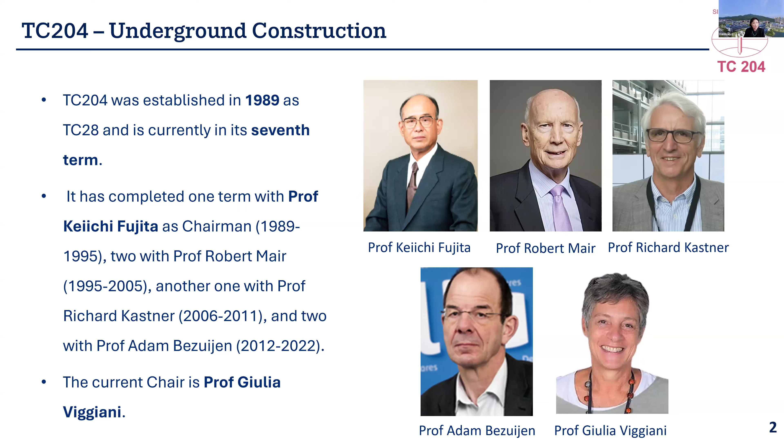So our TC is underground construction in soft soil. We mainly focus on the geotechnical aspects of underground construction, especially deep excavations, tunnelling, and major underground structures. Particularly, we are focusing on the analysis, modeling, and monitoring of ground movements and the interaction with existing structures, and the mitigation measures and risk management aspects.

Our terms of reference are being updated on the website. You may look into more details. It includes dissemination, guidelines, recommendations, conference assistance, and industrial links. I would say we are very active as a TC. Currently, the executive group includes Giulia, me and Andrea Franza, and we have a weekly regular meeting to discuss the issues in our TC and activities.

So we have 69 members over 29 countries. And we are also trying to encourage more participants, involvement of young researchers and practitioners, as well as representatives from South Africa and even South America. So one of the important activities in our TC is the International Symposium on Underground Construction in Soft Ground.

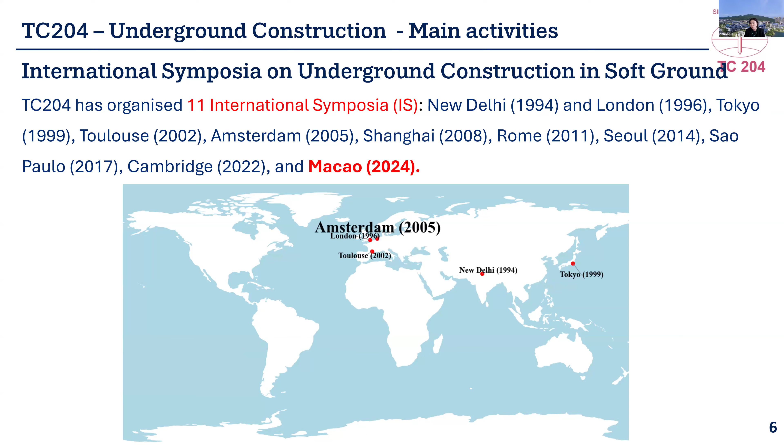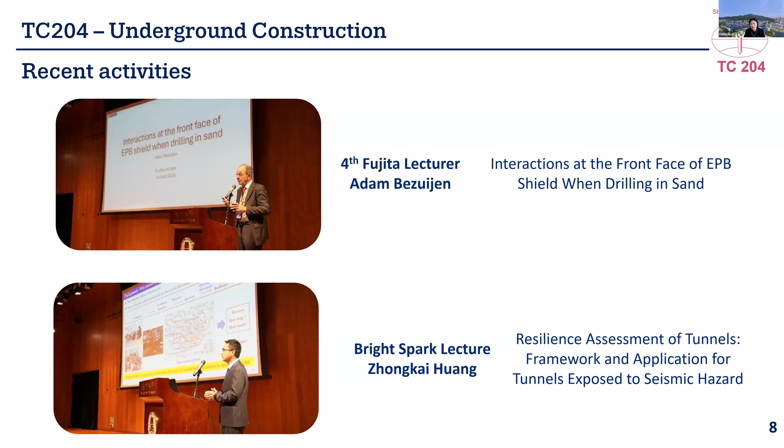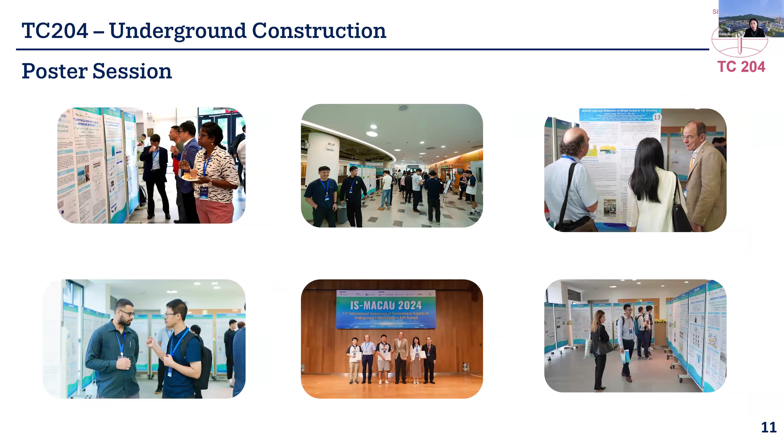During that conference, Adam presented the fourth Fujita lecture, and we had other keynote speakers. The conference also had a poster session, which attracted a lot of interaction during the 2 days. Although we had a very tight schedule, people were always walking around during the coffee breaks and sessions. The roundtable session is also very special. We invited all the keynotes and local industry people on the stage, and had a discussion of about 40 minutes on underground construction in historical areas and tunnelling across sea and coastal zones.

And our TC also supports international conference related events, like the coming Vienna conference. We have a session; especially, our TC has led a joint workshop with TC204, TC222, TC309. And that workshop will include representative contributions from each TC and also a roundtable discussion and also one keynote.

And then the next host of the IS conference is a little bit, again, complicated because of the Middle East situation. The decision from 2 years ago has to be cancelled. So Doha was actually originally designated, but now we consider it not possible to continue. And in March, we just called for candidates. And luckily, within a very short period, we received 2 candidates coming forward. And then with their passion and the local support, they presented in our plenary meeting last Friday. And then our TC members will vote.

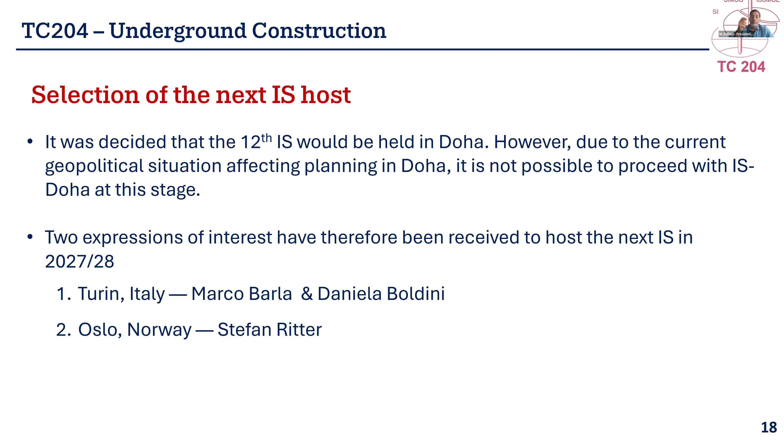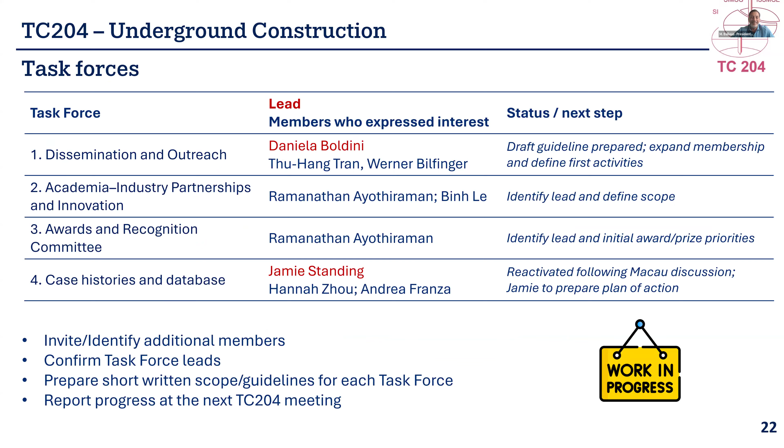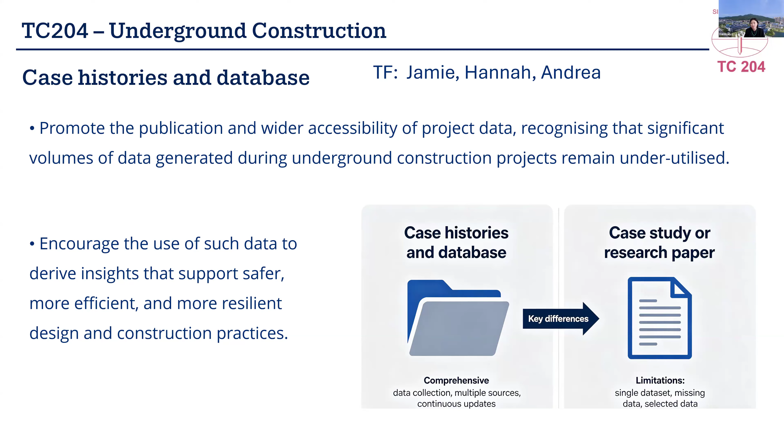And then more important, also related to the topic I'm going to share, is that we are having a task force, including me, Jamie, Andrea, focusing on the case history and the database, because we consider this an important aspect in all project construction and management. It's different from the case research paper, because there are some data not really recorded in published papers that could be very useful in future research. So we consider this should be recognized and well documented.

And my topic today will be, sorry? I'd like to tell you and the audience that we're just now launching a new journal for ISSMGE for research. So we have a journal for case studies, and we now have a new journal for research. Both aspects, like you were showing, I hope everybody will be excited to publish with our journal, the international journal. Yes, that's right. We just nominated our member to the journal's editorial board. Yes, go ahead. Thank you.

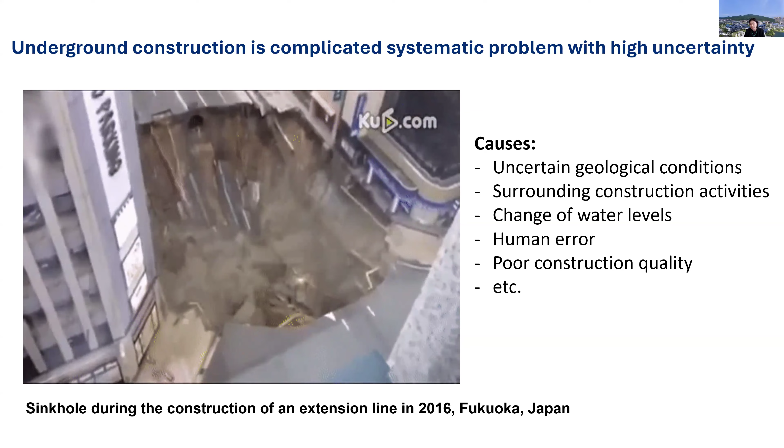Yeah, the topic today focuses on settlement prediction for shield tunneling, but actually I will just introduce some of the previous and ongoing work related to tunneling settlement. One idea I would like to highlight is that underground construction is a complicated and systematic problem with high uncertainty. The uncertainty comes from uncertain geological conditions, which everyone acknowledges, but still we are having problems even in recent years. And of course, other activities and data are not really well recorded, and then human error, etc.

So the topic today will involve three projects. One is the metro extension line in Hangzhou, and the other two are large diameter shield tunnels. The Hangzhou project is regarded as a twin tunnel case, a very interesting twin tunnel case. So this is a project of twin tunnels. The first line on this side, and the second line on that side. The first line went ahead, and the second line followed. It's very long, more than 1,000 meters.

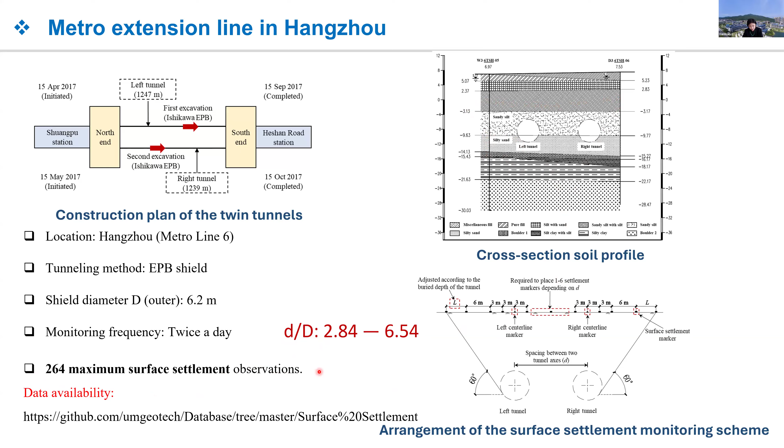So along the construction, they have well documented the settlement distribution of the tunnel. So we try to analyze it, and the spacing of the twin tunnel is changing along this line. So we could observe the twin tunnel caused the surface settlement pattern changing with different d over D. Small d is the spacing, big D is the tunnel diameter. And this is with 264 maximum surface settlement observations. So just jump to the results.

You can see the figure on the left is the smallest d/D ratio, 2.84, so the spacing is a little bit more than 2 times the diameter, which is 6 point something for the tunnel. The blue line is the transverse surface settlement profile when the first tunnel excavation is passing. The red line is the additional settlement caused by the second tunnel excavation. So the first plus the second additional is the black line, showing a W shape. This one is well recorded, and it is changing with different d/D ratios.

And we actually can see when the D over 4 times, over 4, then this pattern dismisses. All right. So the first tunnel has this very symmetric distribution. The second also symmetric distribution. So this actually is well documented, and then we have observed this pattern.

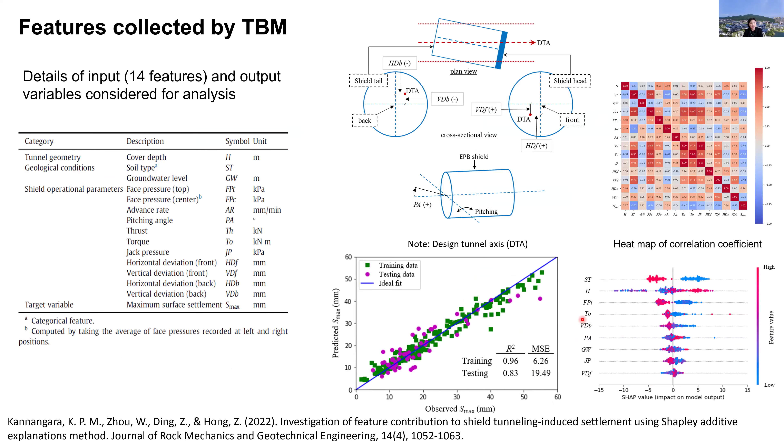And then analyzed the pattern. And in addition, because during the construction, we also have a lot of geological conditions. For example, the soil type may change, the soil overburden height changes, cover depth changing, water level not changing too much. And we also have a lot of shield operational parameters, so we analyze this using other machine methods to make data feature selection and even prediction.

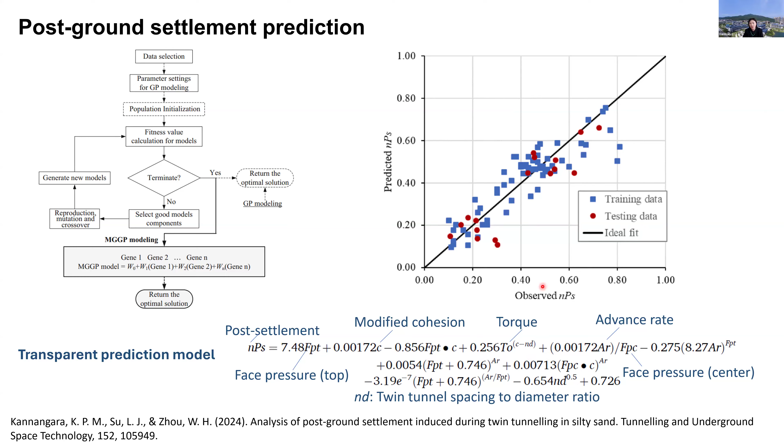I would like to go to details. I think the data is the most important part. With well-documented data and labeled data, our new techniques can do a lot more. And then another about large diameter shield tunneling. One completed work is about the Green Hart tunnel in the Netherlands. It's regarded as the biggest one in 2004, with a diameter of 14.87.

And then this tunnel is going through sandy soil, with, I can see the little person at the bottom. Little person? Oh, 14.9, yes. Yeah, right, because it's really big. Yes, with the peat and clay overlying.

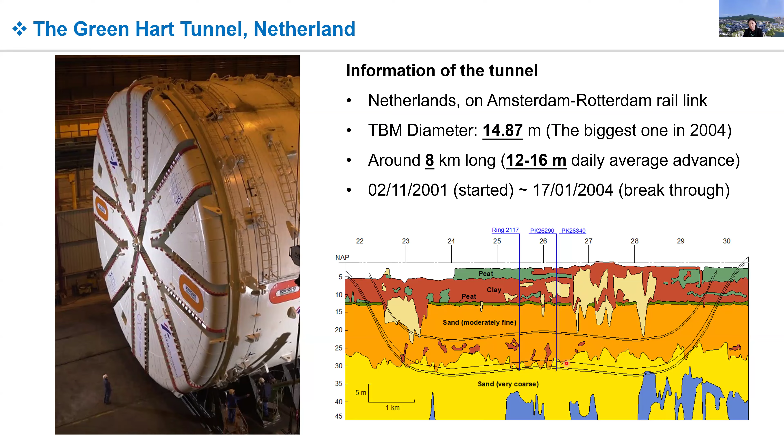So there is a concern about the excess water pressure during the tunneling. And in that case, it's a very rare case that the contractor installed a number of pore pressure transducers around the tunnel, even at places very near and far away, and grout pressure transducers, slurry pressure transducers. Then there have been 1,600 time steps of recording.

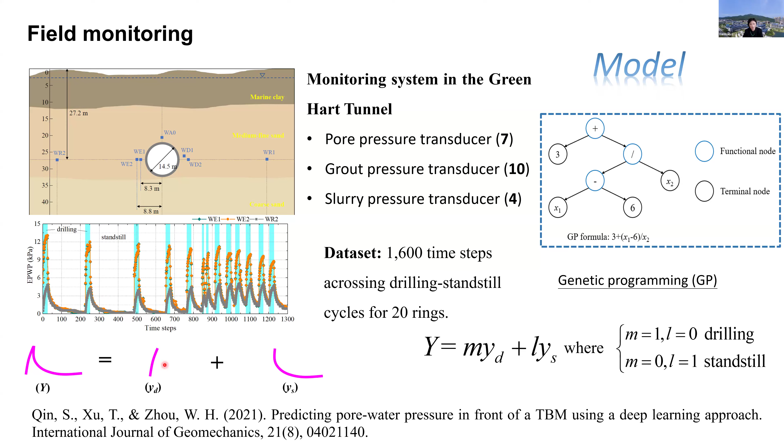On the left, you can see the water pressure is increasing and dropping during the drilling and standstill procedure. So we made this analysis, just using the genetic programming method that can simulate this pressure distribution. But this is purely a data-driven approach. Because of the data, we could do this easily, and then we can plot this spatial temporal excess water pressure distribution as the tunnel is progressing.

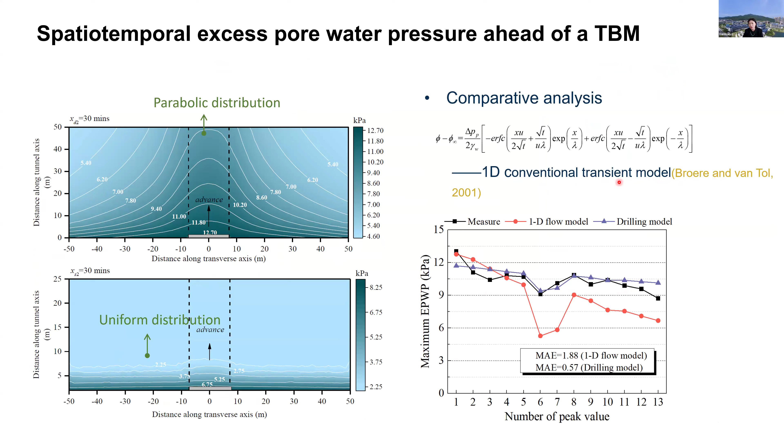So of course, because it uses all the data, it performs much better than the one-dimensional conventional transient model, which can only utilize limited data. So that is another topic.

The last case I would like to present is the ongoing project in Macau. This will be the largest, and it's still ongoing, slurry pressure shield tunneling. It is underground and crossing the sea from the E zone to A zone. Both are artificial islands, so it makes a connection between the two islands. And one thing I would like to emphasize about the case is

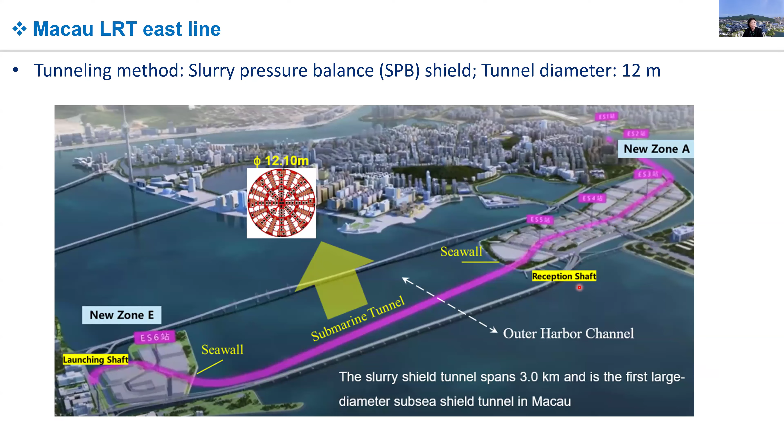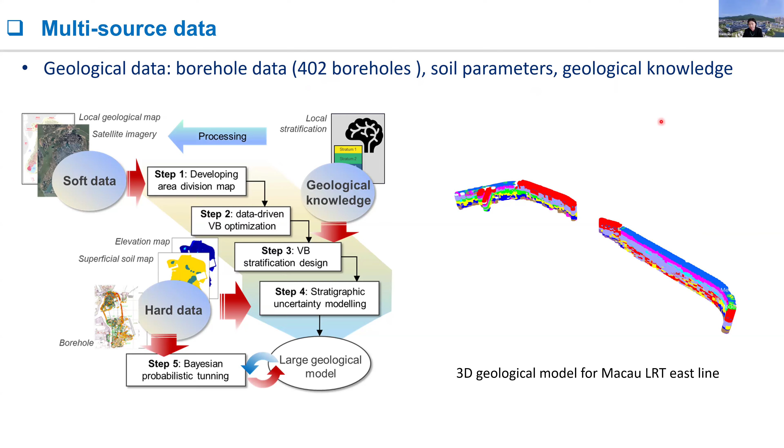it's multi-source data. The multi-source data include geological data, around 25-meter interval boreholes, 402 boreholes, and of course additional soil parameters and geological knowledge done before and after the drilling. And then we have the TBM. Now the machine is very advanced, so a lot of operational data can be transferred in real time. Thrust, torque, advance rate, grouting pressure, those are automatic.

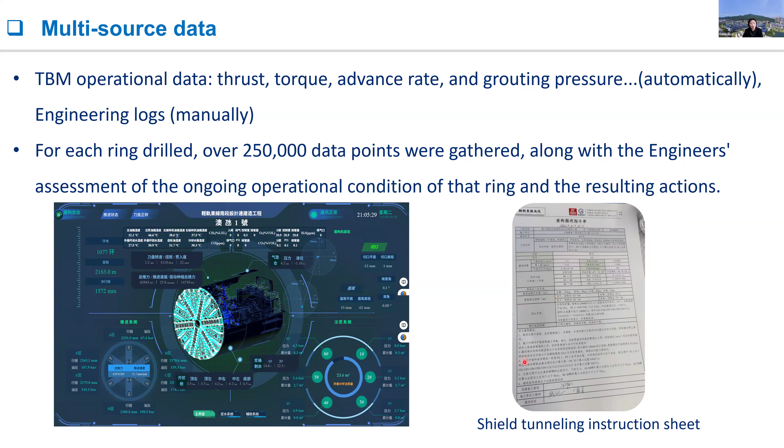But there are also very important engineering logs. For each ring drilled, there will be 250,000 data points, along with the engineer's assessment of the ongoing operational condition of that ring and the resulting action. So these logs we are also trying to collect, and how they change the pressure in the front and the grouting pressure, and sometimes they even change grouting materials to control the post-settlement.

In addition, because we have a collaboration with the construction company, before the tunnel goes into the sea, there's a sea wall. We are very concerned, because of the limited distance, about the deformation caused by the large diameter tunneling. So we have additionally installed in-depth settlement, water pressure, and lateral and vertical deformation monitoring at different distances. So these are very comprehensive monitoring results.

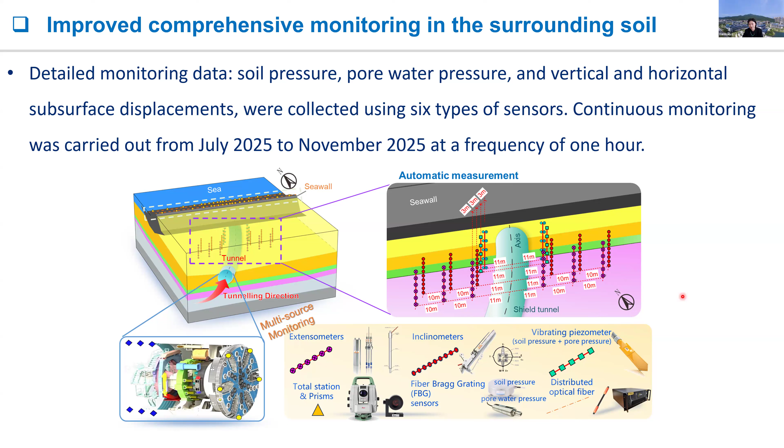And of course this tunnel went through very well, but I think this recorded data will be very valuable for future research, because this tunnel is not perpendicular into the sea crossing the sea wall. It has an angle. So with this small radius and also a large descending gradient, it's about 0.5%.

And then because of this small radius, the tunnel is always turning. So the pressure on left and right is always a little bit different, and our soil response on the two sides is also different. And in addition, with the data, we are doing ongoing analysis about controlling tunnel settlement and uplifting by the property and pressure volume of the grouting materials.

And then we are evaluating and predicting the sandstone condition using the data monitored by the accelerometers installed in the chamber. Yeah, because of the time limit, and also this work is ongoing, I hope that I have another chance to present our results on other occasions. Okay, that is all.

And my final conclusion is that underground construction is a complicated and systematic problem with high uncertainty. Field monitoring is very important, and multi-source data is valuable and underutilized, because most of the current studies focus on the data of one project. If we can utilize more data from multiple projects, that will give us much more insight. And then there's a problem of mismatching of different projects. And machine learning is very powerful in prediction, given sufficient and standardized data, labels, and knowledge.

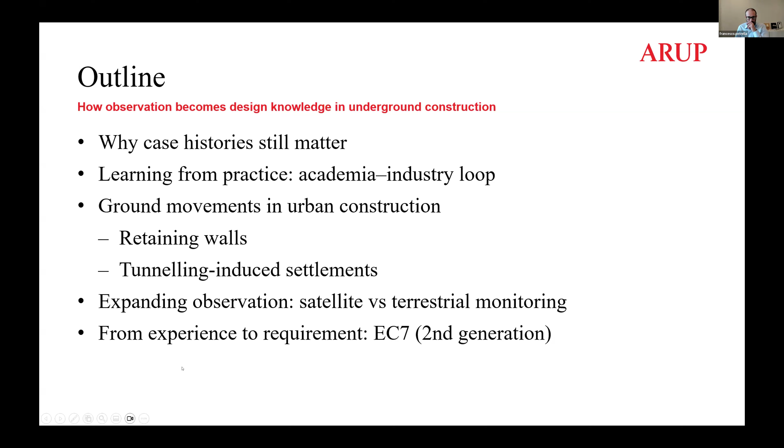So I would start from a quote which is almost 50 years old now: the benefits that derive from well-documented case histories are undeniable. That was Burland who said that. And the reason is simple. As Hannah was saying, there's variability in the ground. The ground is variable, is uncertain, is only partially known. Every design therefore relies on models, and all models are a simplification of reality.

And then on top of that, many of the effects we need to worry about are induced during construction. So effectively, reliability cannot just come from calculations. It has to also come from observation, measurements, and learning from past projects. That's why case histories are still important. And really, case histories are how our discipline actually builds new knowledge.

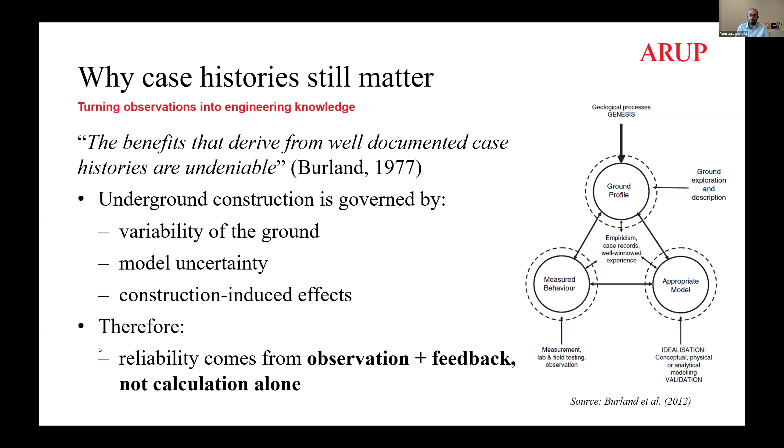So, going from projects to knowledge, I want to take one example, which I consider a living laboratory: the Copenhagen Metro. There have been very many metro lines, and I use this to make a few points. There have been more than 10 years of collaboration between the metro company, two Danish universities, and other universities, also in Italy now contributing, as well as the company I work for, Arup, and others.

So it's really to follow that continuous loop, or you could say virtuous circle, of monitoring, analysis, publishing the work, and then going to an improved design. And this takes years. We started many years ago with master theses, asking some enthusiastic students to start back-analyzing the behavior of many of the stations built in the city, and the many kilometers of tunnels. Then it became PhDs, with lots of technical papers, at the beginning conference papers and now also journal papers. So as a result, there's already a significantly improved understanding of ground movements in Copenhagen.

So this is the first of 3 case histories. I'll be brief. I'll stay within the 15 minutes. The first one is about parameter correlation, and it's just a snip of one of the stations that has been built, and it's a deep excavation in this case, right?

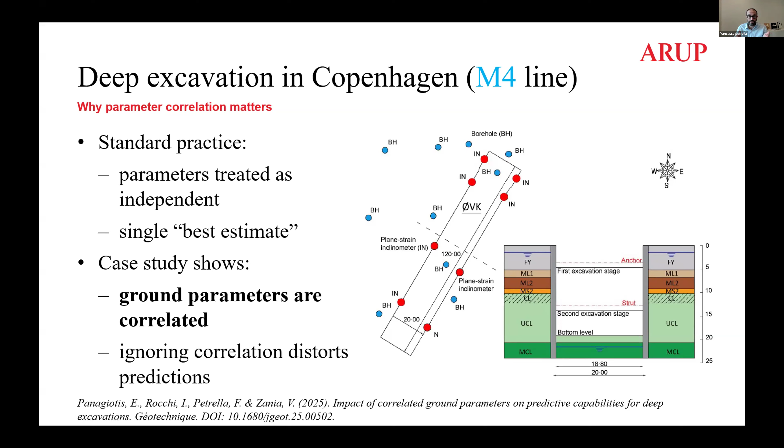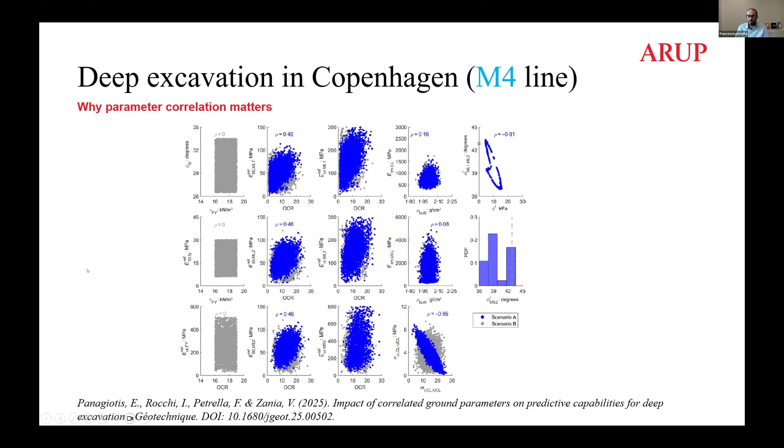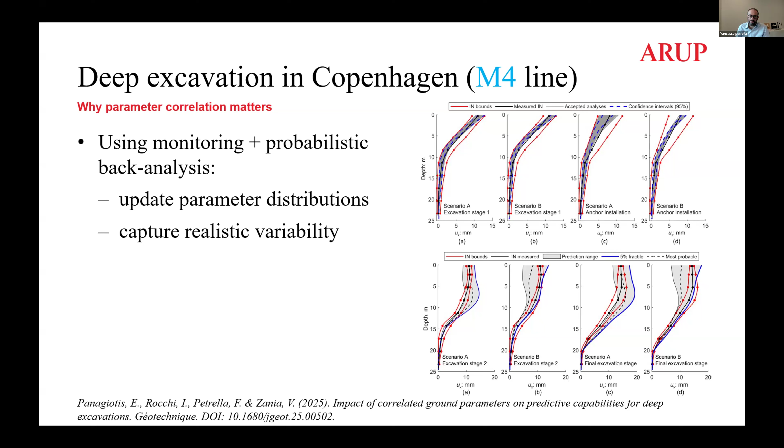If we go on with the excavation, the x-axis changes a bit. Here too, scenario B for the intermediate excavation stage 2 and the final excavation stage gives a superior back analysis. So the outcome is that, first of all, there's better prediction, but also importantly, we can obtain a faster and more stable back analysis, almost by one order of magnitude, because it took us 8 times fewer analyses when we worked with correlated data sets.

Francesco, yeah. Can you zoom on the graphs? Just explain the snake. What is the gray zone? Zoom on the 4 graphs. I'll try. Because I can't see. Is that better? Yes. Scenario A, B. That's zoomed in.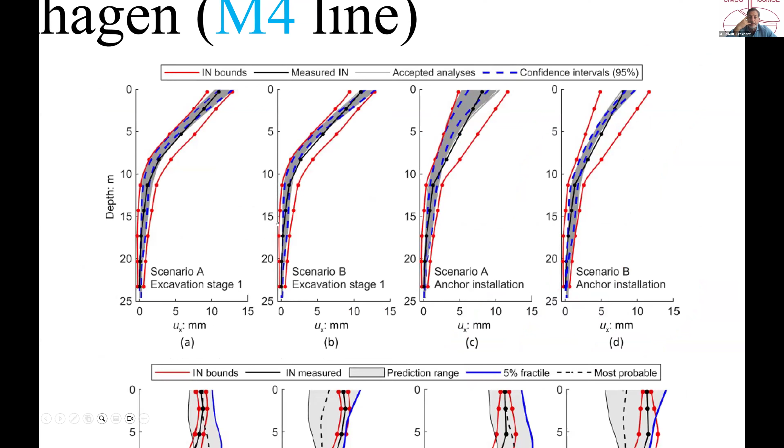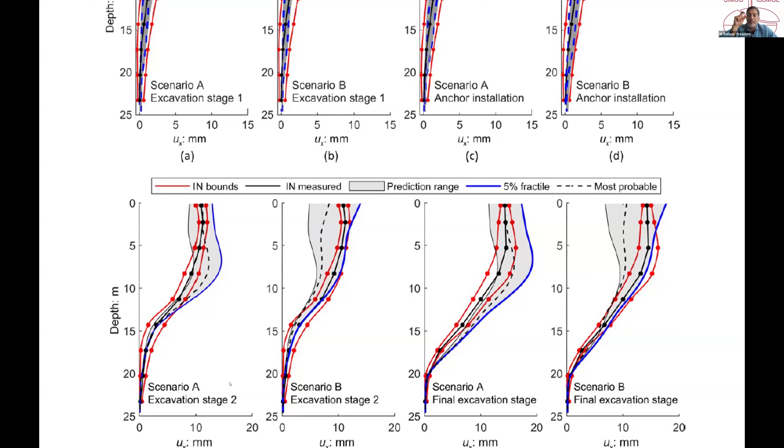So on the left-hand side, there's the same excavation stage. That's just the first. So as you go deeper, there's more displacement. I was warning you that there's a different x-axis. That's unfortunate. But as you go deeper, this is the second excavation stage. This is a multi-propped, you could say, excavation. It's supported by anchors. Your x is the settlement? Horizontal displacement of the wall, okay. Yeah. And this is the depth.

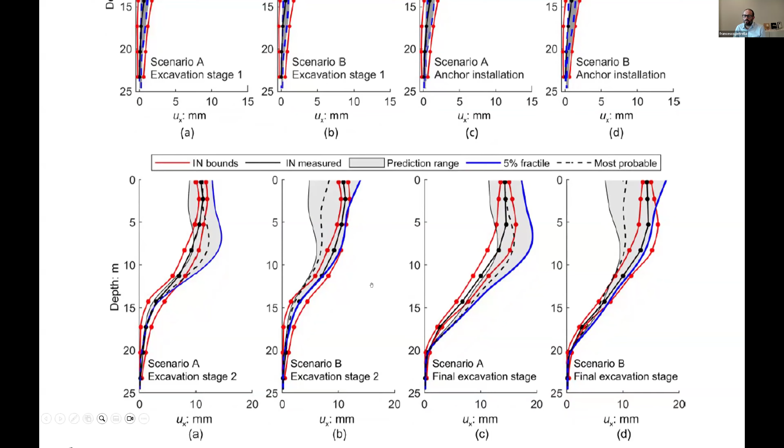So the bounds are the prediction range, and then there's the comparison between what has been measured in black and what has been back analyzed, and the difference between scenario A and B is whether you use independent parameters or correlated parameters. As you can see, there's a better back analysis with correlated parameters.

Thank you. It's clear. I'm playing the role of a viewer. That's very helpful. Thank you.

The next one is for the M3 line, which actually preceded this one, and it focuses more on settlements that occur behind the wall. Again, another deep station box, in this case supported by secant pile walls with multiple levels of struts. You can see that here in plan, and there's a building alongside it. Hence the interest, of course, in the settlement caused by the horizontal displacement. And here you can see.

Was it done with the top-down technique? We've called it hybrid, in that the slab went in first, and then the rest of the construction proceeded bottom up. So only the slab went first, and then you went down with the props. And then as you built your permanent base slab and permanent intermediate slab, you removed the props. So it's like a hybrid.

The slabs, okay. And this is because the stations for M3 were all in the urban area, and so there was a wish to lock in the wall at the head to limit displacement. Stiff glacial deposits overlying limestone, that's typical of the ground conditions here. And then basically, we were comparing prediction approaches that are typically used in the industry here.

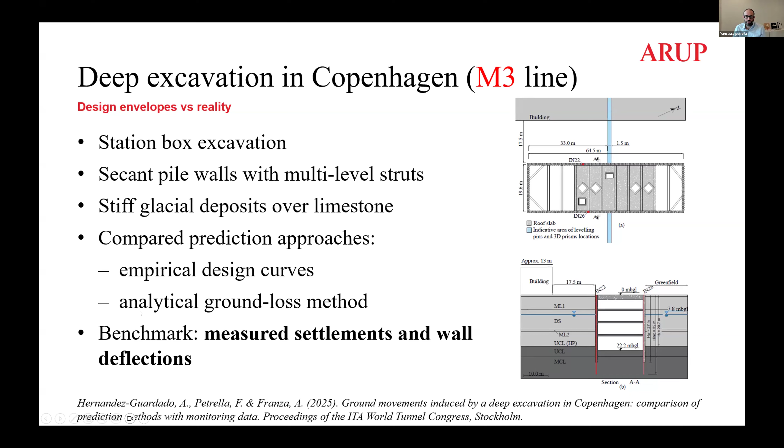Empirical design curves or analytical ground loss methods, with the benchmark being the measured settlement behind the walls and the wall deflections themselves. The results are quite clear, and I'll take you through them. Basically, the empirical design methods tend to overestimate the settlements, typically by a factor of 2 or 3, and they also overestimate the extent of the influence zone. Whereas in contrast, the measured behavior shows smaller settlements and a more localized response.

So if I zoom in - on this right-hand side, on the left, you see the wall displacements. These are the horizontal displacements for two inclinometers that are opposite each other, and with the solid circles, those are the measurements. So very limited settlements, less than 5 mil. With the dashed or continuous curves in the central part, figure B and C, you will see the predictions in greenfield conditions or in conditions where you have a building next to the wall. On the right-hand side, you see the back analysis that was done, which shows a better alignment with measured data.

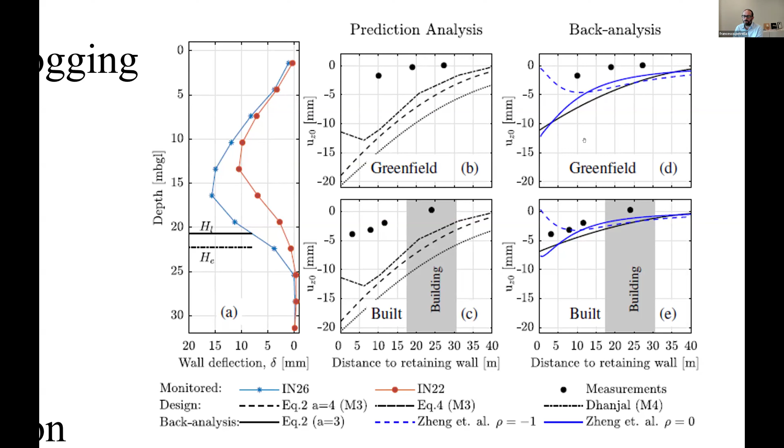Basically, when we switch to a ground loss approach, which links the settlements to the actual wall deflections, the predictions improve significantly, particularly when based on monitoring data or calibrated against previous projects. So the key takeaway is that rather than relying on generic envelopes from textbooks, we should always use observed behavior to inform and calibrate our predictions. This work was published at last year's WTC in Stockholm.

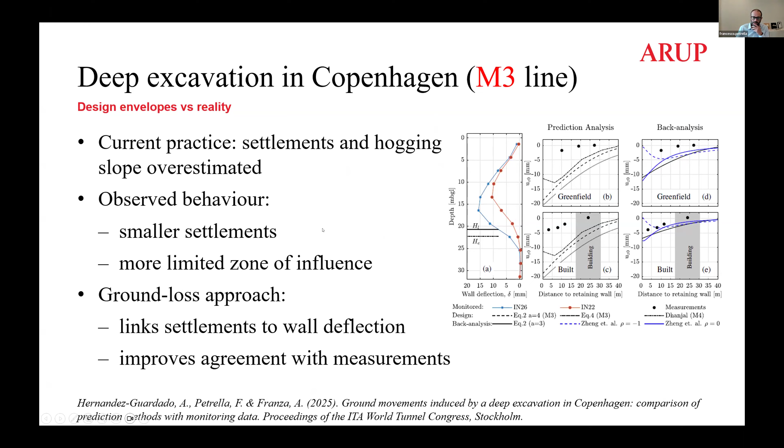I'll finish with a few words about satellites and the InSAR technology. Another tool, you could say, in our toolbox these days, so that we don't solely rely on terrestrial monitoring, but also have satellite monitoring. The real power of this technology is the archive, this data set, the ability to go back in time. That allows us to build a baseline even before construction starts, which helps identify critical assets that may already be undergoing settlements before any project or works begin.

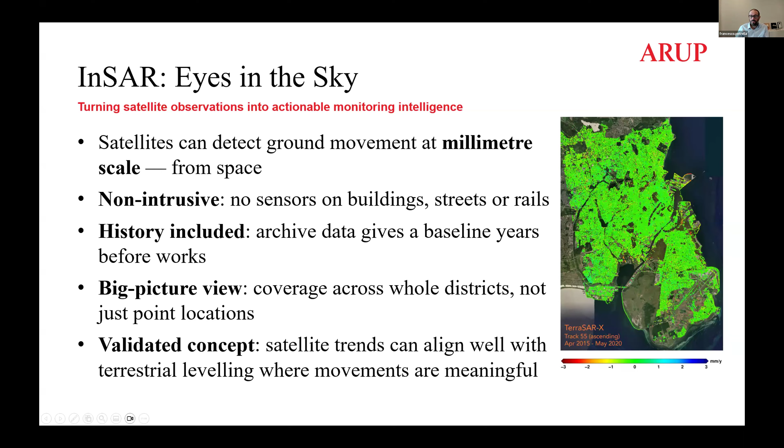Instead of having a handful of points scattered around, we get a district level view. On the right-hand side, you see a zoom out of Copenhagen, which helps us see patterns and not just isolated readings. It's helpful before construction for baselines and focusing terrestrial instruments where the risk is highest. It helps during construction to fill in the gaps, and of course after construction for long-term monitoring and screening of anomalies.

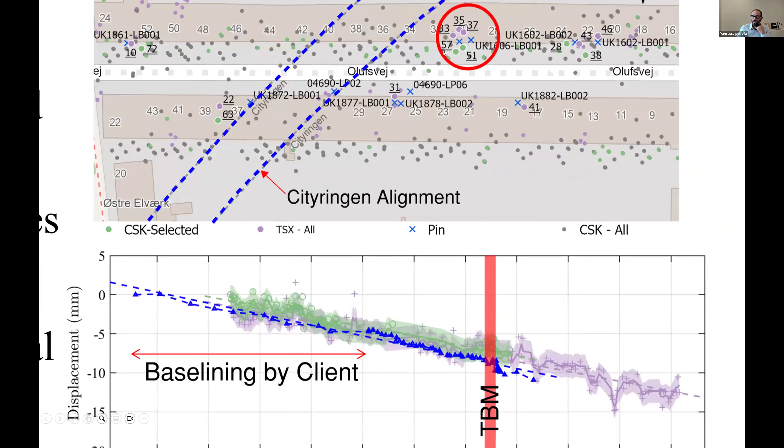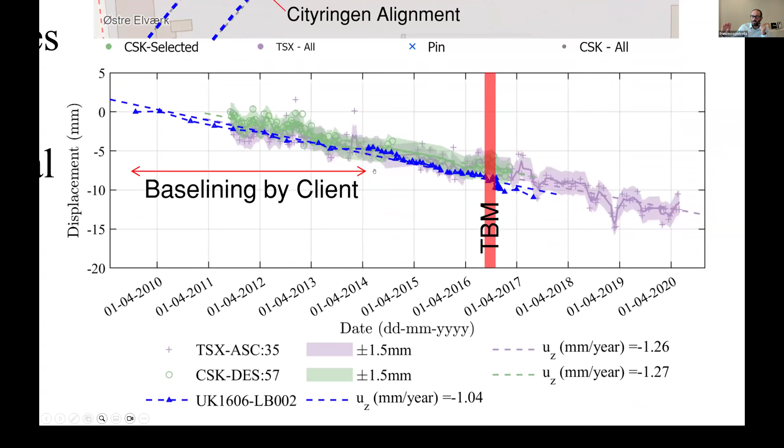On the right-hand side is a case study we've looked at, where the dashed line shows the alignment of two of the tunnels. We've plotted displacement, so settlement, over time using certain terrestrial monitoring equipment. The triangles are the terrestrial monitoring data, whereas the green and purple bands are the satellite monitoring, which align quite well. As you can see, they help you go back in time, and the client was able to demonstrate that there was ongoing settlement of certain assets, and it wasn't the passage of the TBMs causing the settlements - there were other factors at play.

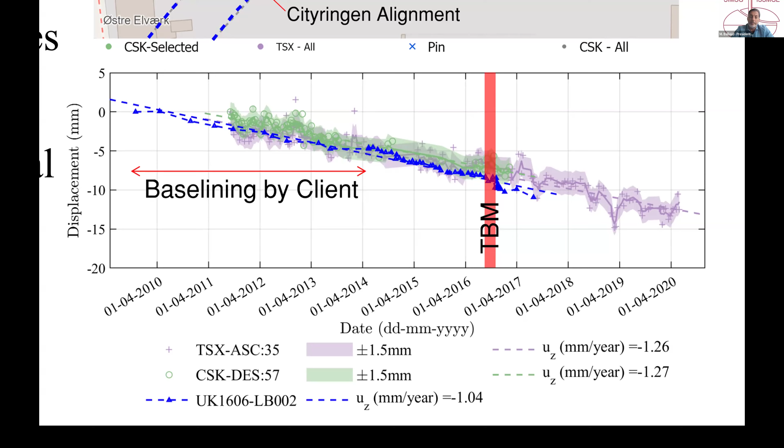This is a great observation - I love satellite monitoring. Yes, and there are new satellites being launched now with different wavelengths. You can see through vegetation. Yes, we will be able to see through vegetation, because I'm using it for a project in a jungle, a highway crossing in swamp areas. Thank you for mentioning it.

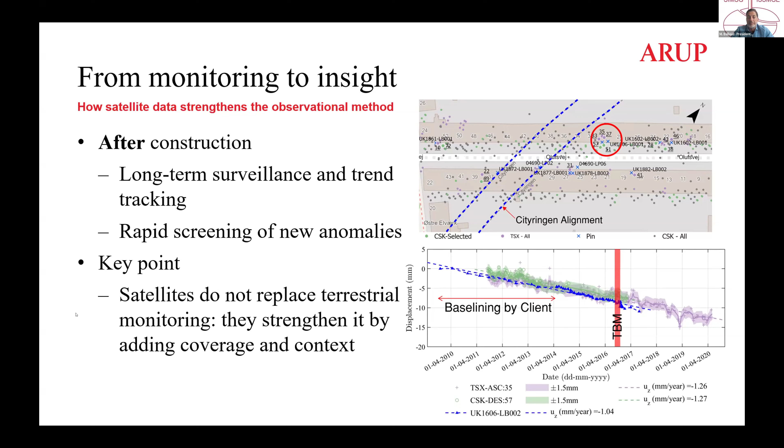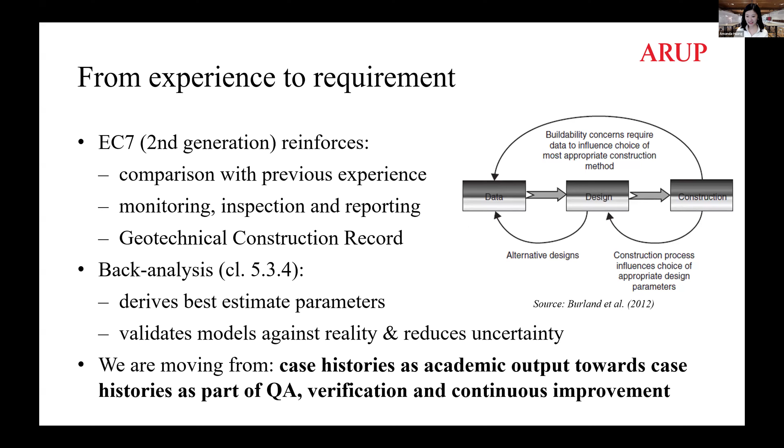Thank you, thanks Marc for that introduction, and thanks Hannah and Francesco for the beautiful presentations. I'm definitely seeing a lot of synergy from your presentations to things I'm going to share. But I'm probably going to switch the flavor from the construction stage to the design stage a little bit, or the planning stage.

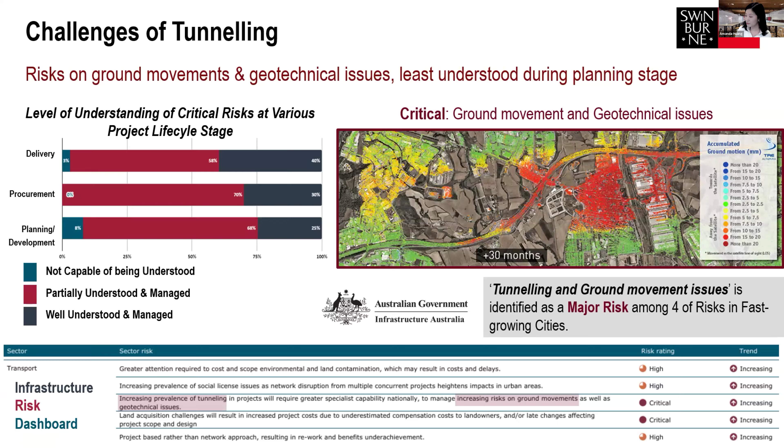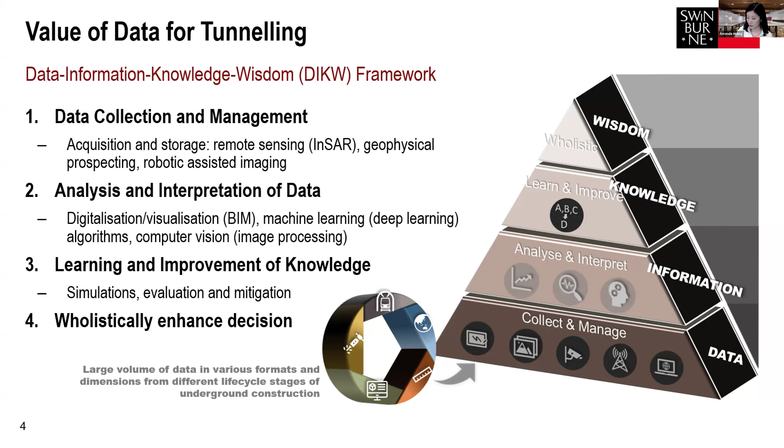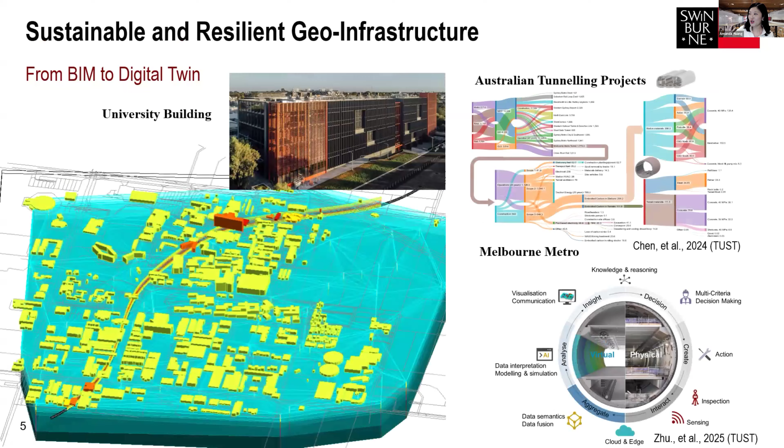This framework is quite powerful and can be applied to many different projects throughout the entire project life cycle. As part of the team, we also did some work for tunnel design considering carbon emission as a key factor, trying to do multi-objective optimization to improve tunnel safety while not compromising its sustainable performance.

Okay, it really wanted me to move on.

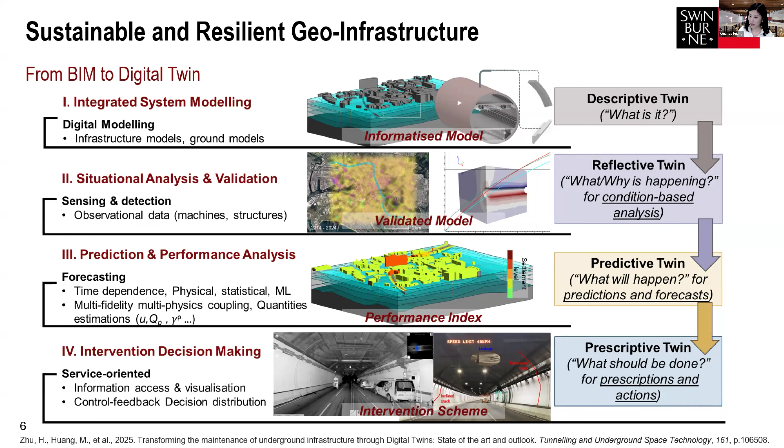Another way to look at that framework is what we call a multi-level digital twin. Depending on the increasing level of complexity of information gathered from a static way of representing the existing or to-be-built asset, we can incorporate dynamic updates through more sensing, inspection, and monitoring. We can then start to answer questions from what is it, to why or what is happening, through simulation and evaluation to predict what will happen in the future. And finally, in an ideal world, the digital twin can also prescribe mitigation measures, saying in this situation you can do this.

So the workflow we've been taking for design and construction is mainly object-based modeling, which is a BIM-oriented object database. Then in the multi-platform collaboration stage, we allow models created by different platforms to be integrated and federated in order to understand their interaction. Finally, once we have real-life project data, we can do back analysis to validate our simulation and our numerical model.

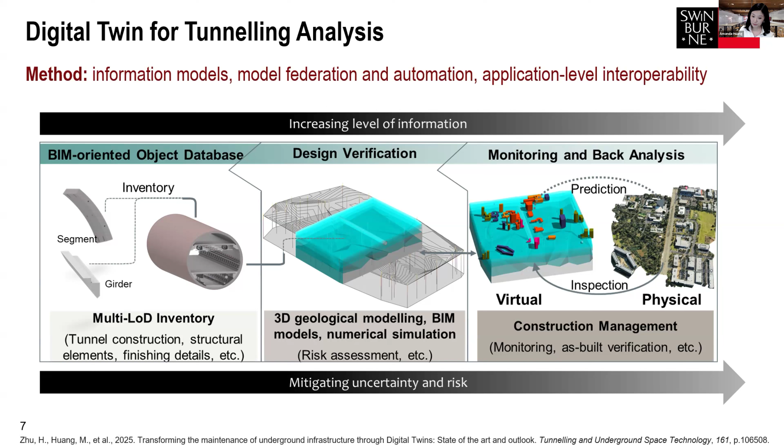The increasing level of details means we can construct a model at different levels of detail, including geometrical details as well as semantic details, to serve different use cases. For example, the very low level of detail 100 can be used for spatial clearance checking, level of detail 300 is good for numerical simulation for geotechnical analysis, and finally level of detail 500, which includes all the fit-outs and detailed elements, is more suitable for construction management scenarios like quantity takeoff and detailed cost estimation.

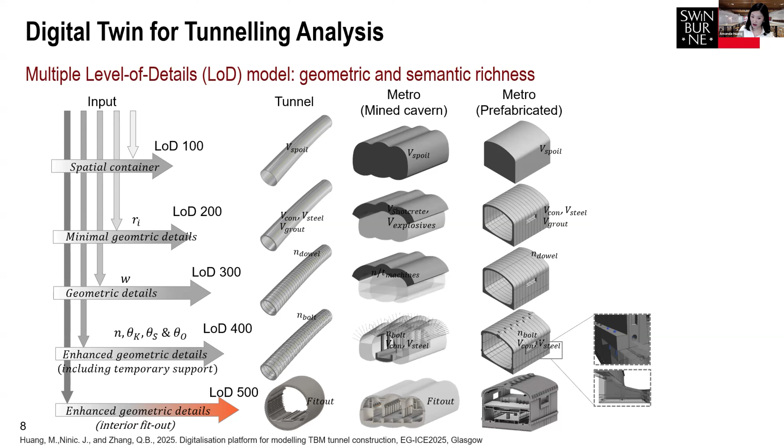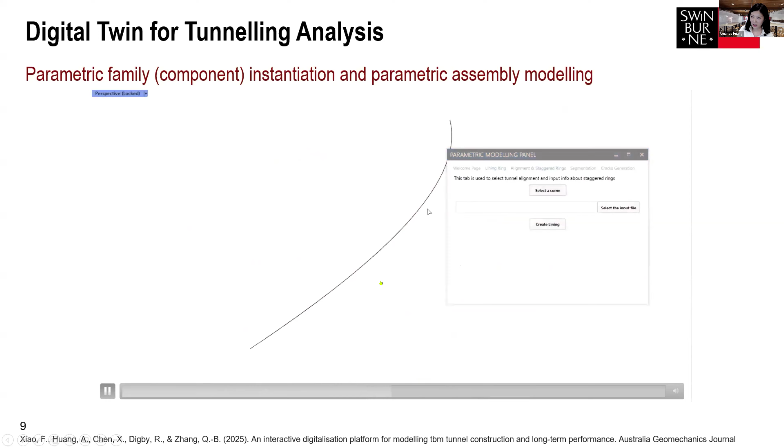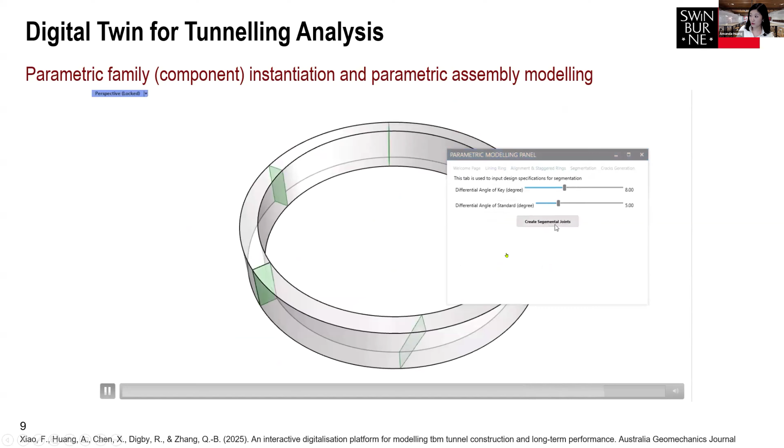So just a quick look at how we can do parametric solid modeling. This is a demo showing we can instantiate the solid model by prescribing the number of segments, the internal radius, segment thickness, and segment widths, and select the alignment, any alignment that you created. That can pop up like a lining model, and we can increase the level of detail by setting up the actual segment configuration and then creating a segmental lined tunnel model.

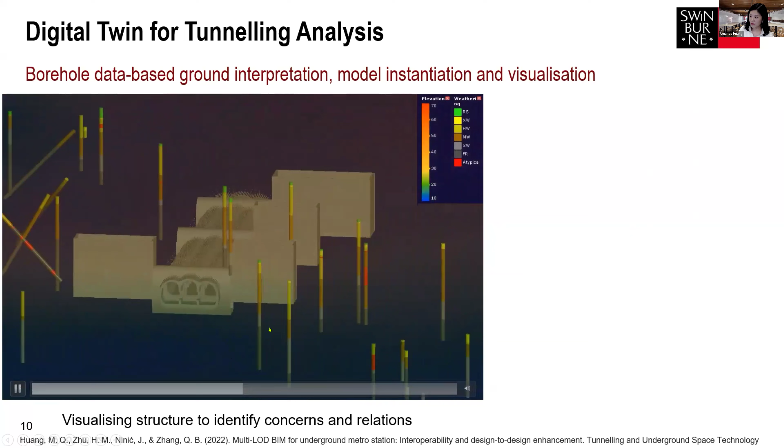Once we have our asset models set up, we then move on to the ground modeling or geological modeling stage. There are many different types of platforms facilitating these purposes. In this case, it's a commercial software, but we can also duplicate this same process in a BIM environment.

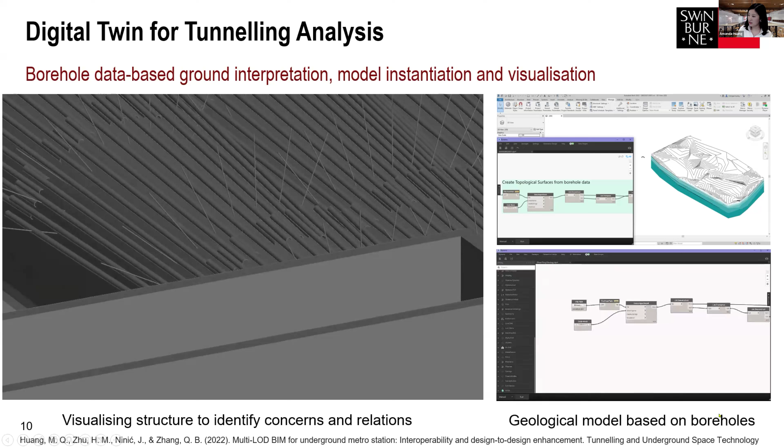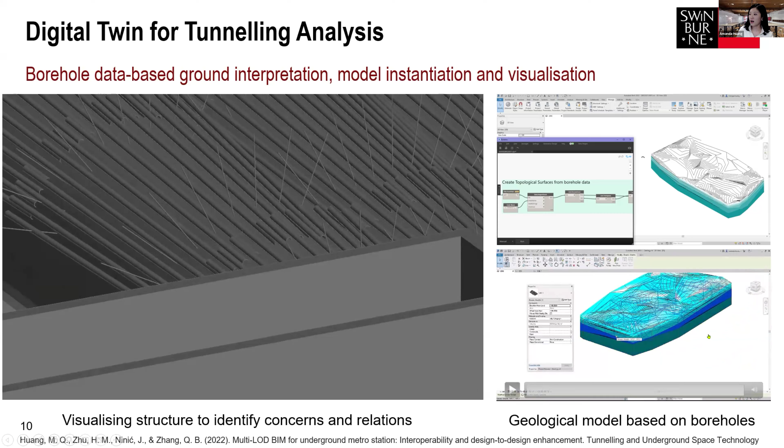We can instantiate all the borehole instances and create a ground model in a commercial BIM platform. All of them are featured with their geotechnical properties, as well as the strata geological forms. Similarly, we can also establish a building model in the same environment by pulling out information on the building height, the shape of the building, and geo-referencing them again in the same platform.

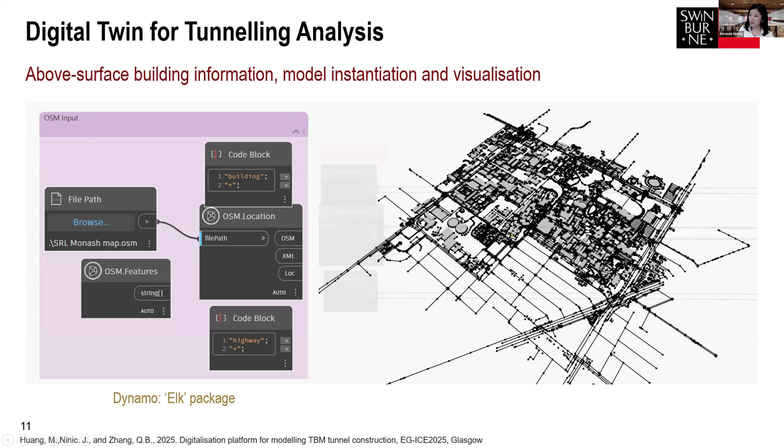So once we have all of those disciplinary models, we can integrate them together so they form this federated model for analysis, and there are many different ways to do this.

Sorry to interrupt, what software are you using for the digital twin of the tunnel?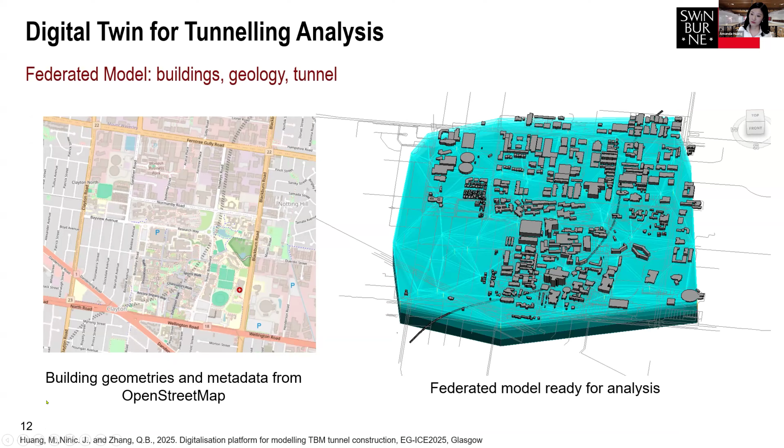So in this example, I'm using Revit, which is a software from Autodesk. Yeah, it's a BIM platform, quite recognized and probably used by industry as well.

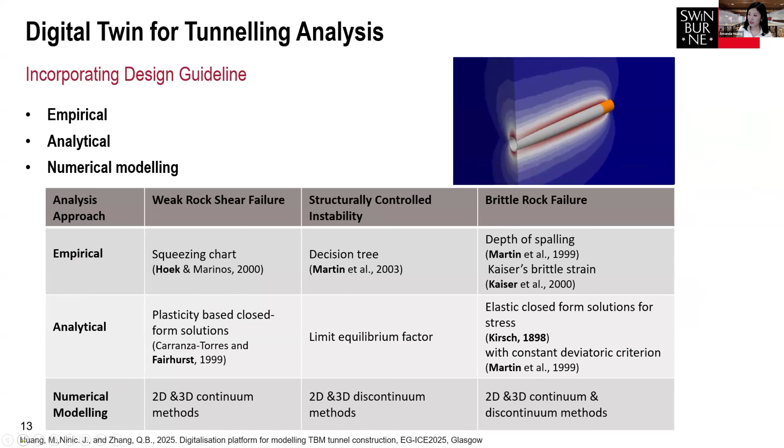And then we have many ways to perform analysis, whether it's empirical and analytical or numerical model. The easiest is to embed the analytical model into our federated modeling environment. As a quick check, probably during preliminary design stage, this serves as a quick way to check stability of the tunneling activity.

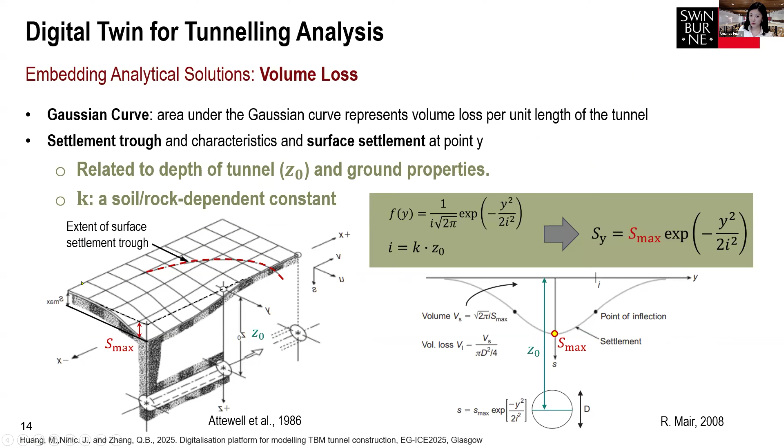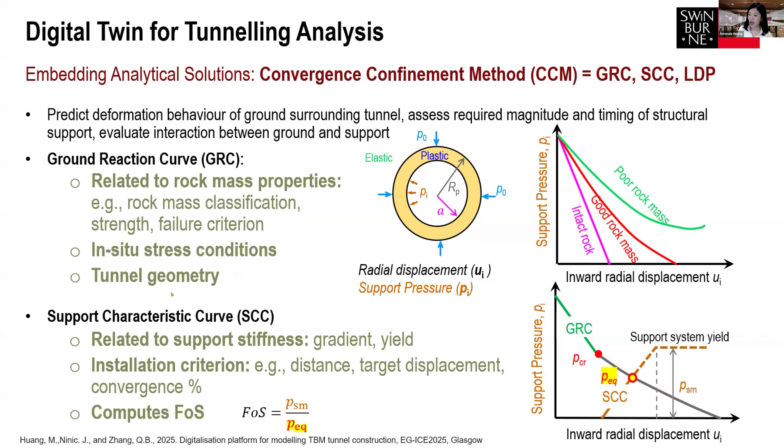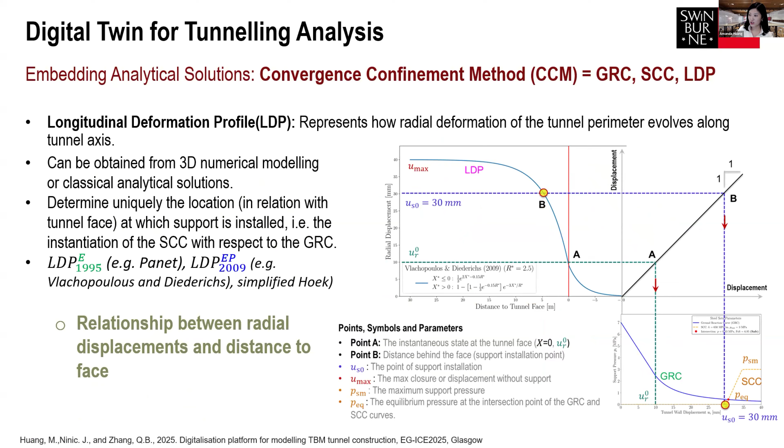So we embedded two analytical solutions. The first is the volume loss, the Gaussian formulation, to estimate the settlement trough. The second analytical solution we embedded is the convergence confinement method, with three significant curves: the ground reaction curve, the support characteristic curve, and the longitudinal deformation profile. All of these are associated with the ground characteristics or ground properties, and also the tunneling methods, and all of that information will be embedded into the modeling platform.

So we input the alignment. This is actually the alignment from the Suburban Rail Loop Eastern package, and also the ground model of all the existing buildings. We then prescribe the ring depths, the tunnel radius, the list of tunneling methods, and we can select tunneling methods. Whoops, I think I accidentally clicked on something, sorry, let me move back.

And we can then visualize the final impact of tunneling on the ground surface. Hopefully it's minimal. It is not too bad. And yeah, we're using this color coding to actually differentiate from significant settlement to minimal settlement, and also identify buildings that are prone to those ground volume loss.

And similarly, we can also perform this by ring, because we actually allow each single ring to intersect with the actual geological component. So if they're traversing two strata, actually the ground loss will be different. So we can also look at the individual ring performance as well.

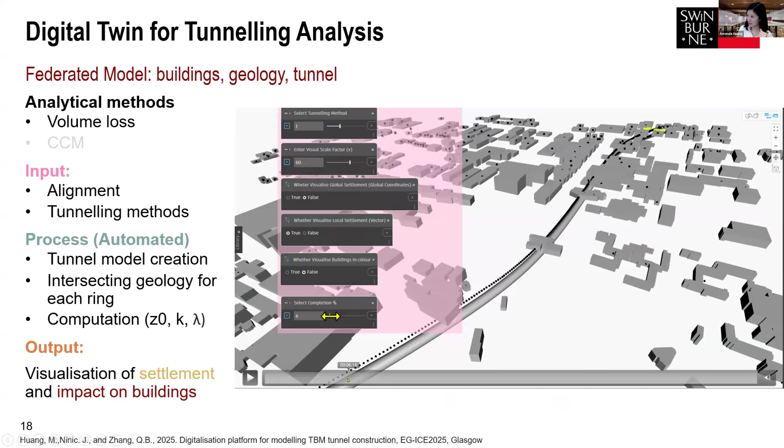Oops, that's interesting. I'm not sure why I'm not showing that. Maybe it's this one. Yeah, sorry, it's this one. So we can actually see the settlement at each single ring as well.

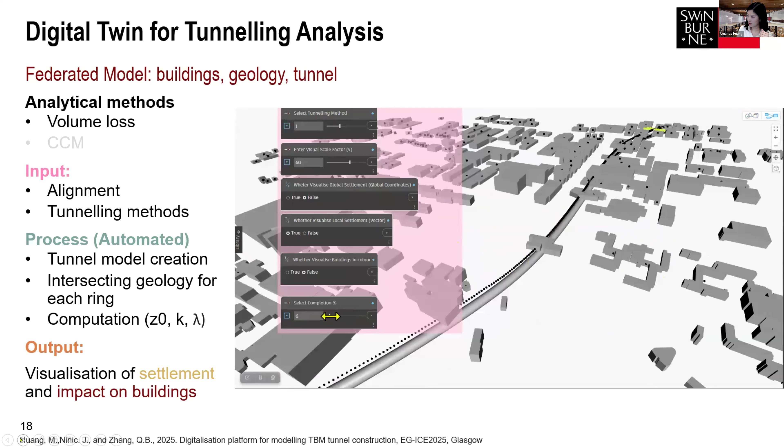And similarly, we can do the longitudinal deformation profile for seeing the convergence of the actual segmental lined tunnel. So similarly, we embed all of those analytical solutions into the model to allow us to visualize, as the tunnel excavates, the deformation surrounding that structure.

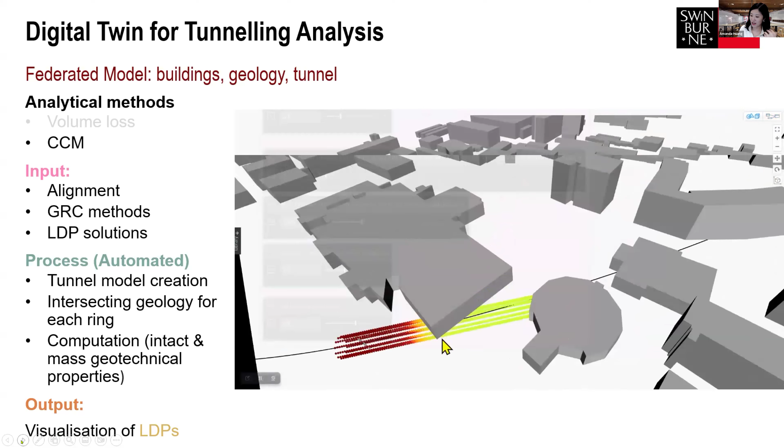So we actually set up, we try to make this platform as user-friendly as possible. So we use some terms that practitioners may appreciate, hopefully. So what I've just shown is mainly analytical solutions, but we definitely can do exactly the same thing with more advanced numerical models.

Basically, we used BIM as the foundation to establish all these geotechnical properties and attach them with the model. And then we convert the model along with their properties into the numerical model, purely driven by script. And then we can actually visualize the post-analysis effect back in the BIM environment.

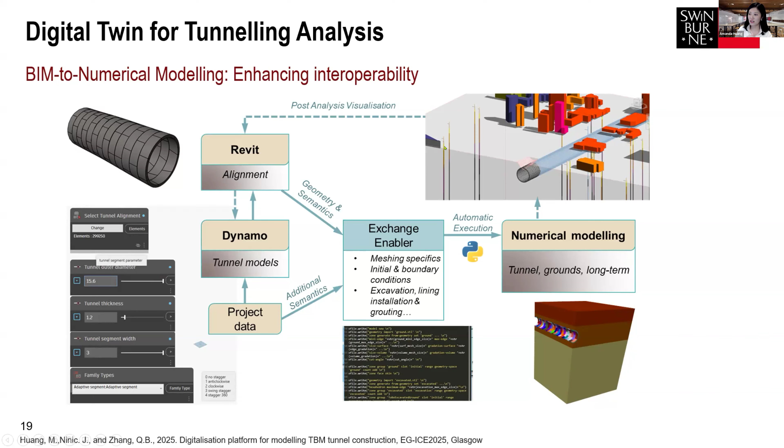It's simply because many times the BIM model is controlled by the digital engineering team, and the actual numerical modeling or simulations are performed by geotechnical engineers or tunnel engineers that do not often speak the same language. So this hopefully can bridge these two workforces together.

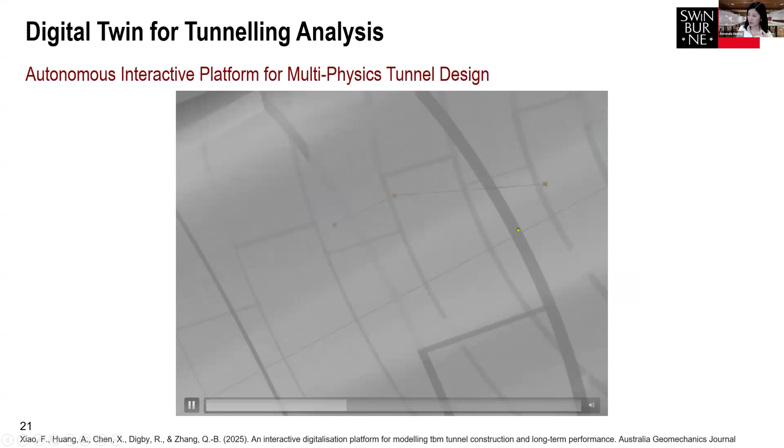And we can also actually perform this for other types of tunnels, like a hydraulic tunnel in this case. So we can actually simulate the crack. Again, we can model out, actually instantiate the crack instance in a tunnel segment, and then perform numerical simulations for that.

So in this example, we actually did it for a hydraulic tunnel, and then we changed the configuration of that tunnel, and we can actually simulate if there are any defects existing in that asset, what will be the impact and what will be the remaining service life of that asset. So similar philosophy and similar mechanisms being applied.

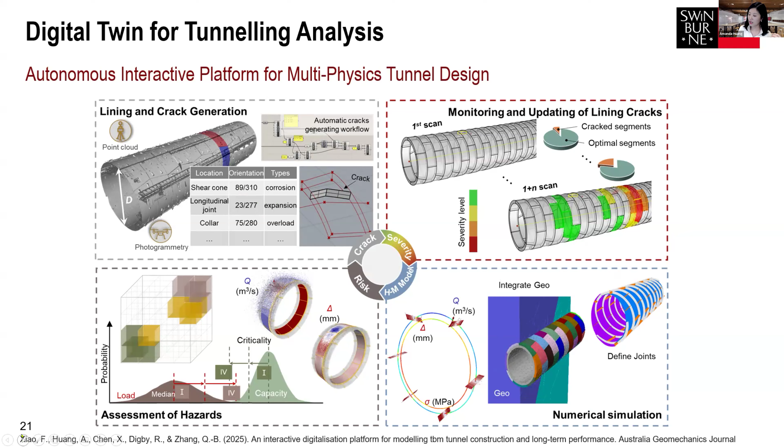And finally, bring back to this slide, I think both myself, Hannah, and Francesco have mentioned there are a lot of more advanced ways to simulate and to predict our tunneling and underground construction. We've definitely seen the wave of AI impacting all of us, but they're still tools, and we should select the tools and use them wisely to make our work more efficient and to benefit more projects.

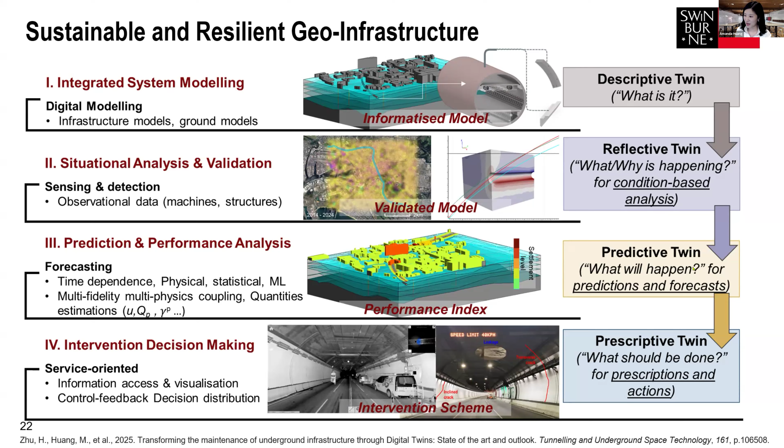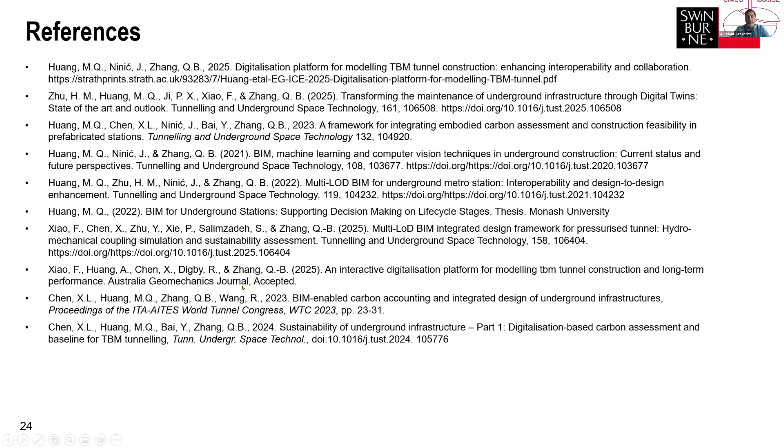Amanda, amazing, beautiful presentation. Thank you, all of you, for complementing each other. I'm complimenting you because you really deserve it. I'm very interested in this, Amanda, if you stop sharing. Yeah, I'm trying to stop.

Yes, and also this working digital twin, it's really amazing. But I also can see a lot of work ahead. You mentioned the numerical model, because the analytical model certainly cannot represent the three-dimensional complicated situation. And Francesco also, the work on deep excavation and the publications. So really congratulations and very nice presentation.